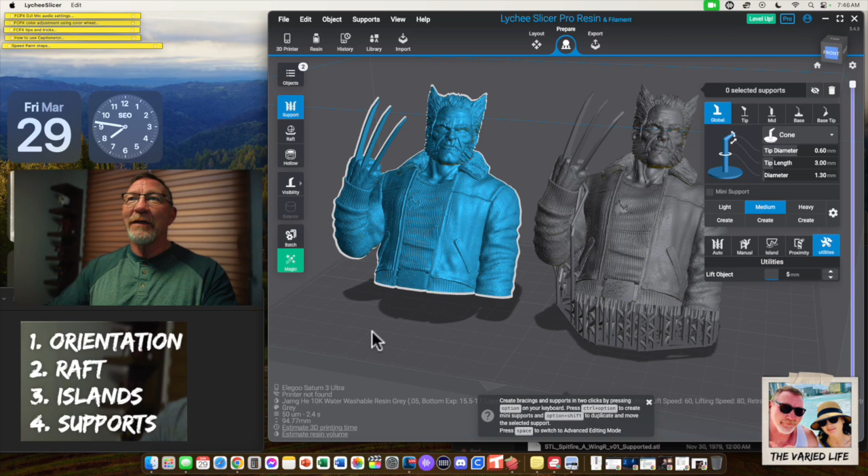So it's kind of like a final exam, if you will, but doing enough practice by using pre-supported and the unsupported models can help you become a pro at doing manual supports. So let's get started here. What we end up having is Logan. Logan is the man. First, we're going to talk about orientation. How do we orientate the model?

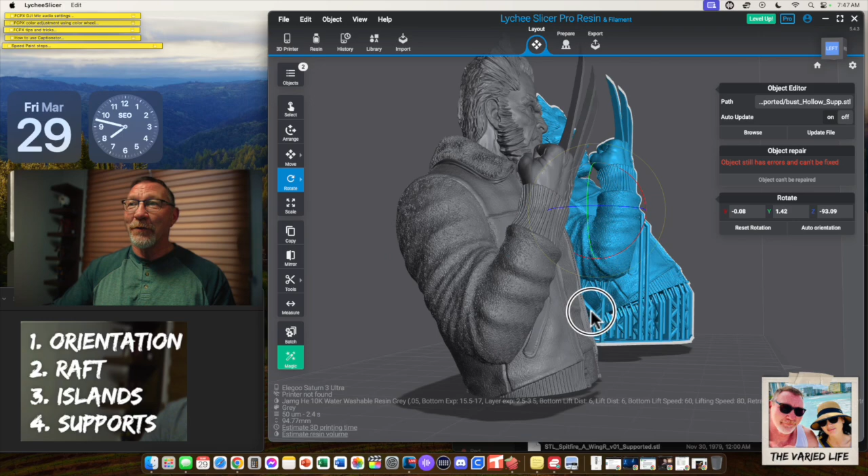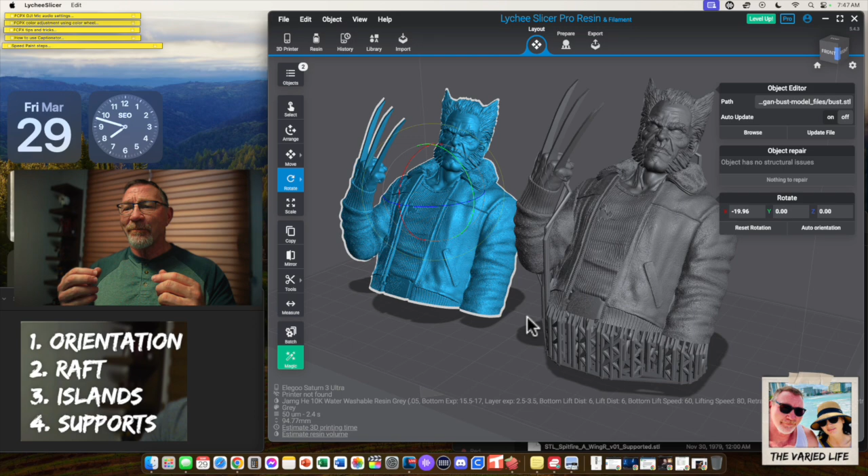And if we look on the pre-supported file here, basically what we can do is look at that angle at which he sits and conclude, I don't know what that angle is, but it prints out perfect. So what I can do is go with this model here, and I can orientate that in the same manner that we have there. So we're good to go. That answers the question in regards to how do we orientate with a model like this. Now you can do this with miniatures, you can do this with figures or different components that you can print out individual models of, because often a model will have different parts that you have to put together.

The other thing we can do is zoom into this part here, and again, we want to look at the orientation. We already got that. The second thing we're going to take a look at is the raft. And we see this raft, and that's the lined triangle raft that's being used. Now, for some reason, the majority of the pre-supported files that I've printed out use the line triangle. So that answers the question of what type of raft should I use.

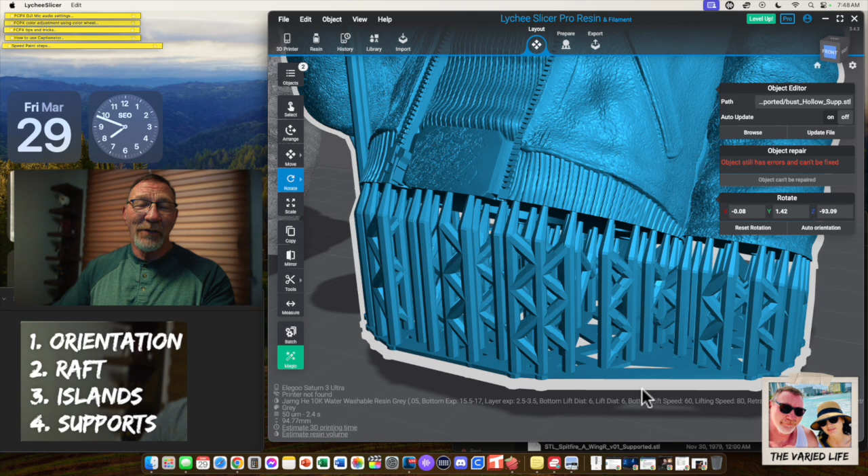There's other rafts that you can use, and we'll kind of go over that, but let's just use what works and copy that. Makes a lot of sense, especially when you print this out with no problems, right? The other thing we're going to take a look at is islands. You could use the slider.

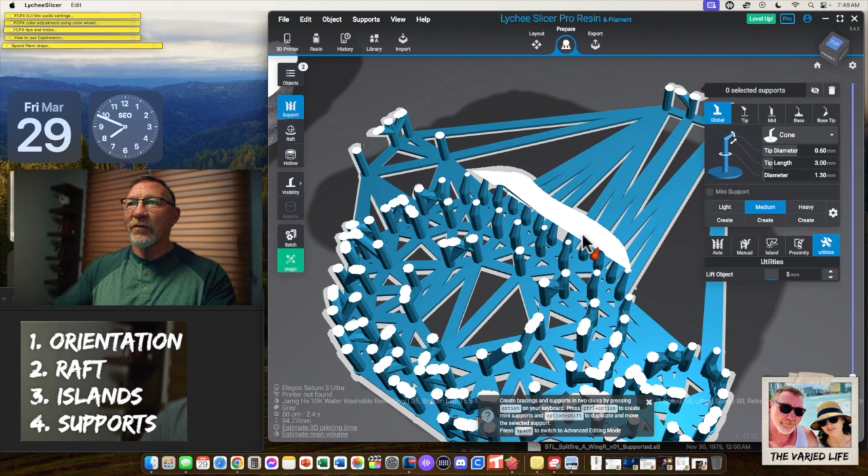So in other words, we could go to prepare, and as we bring the slider down, we can actually see where those first supports came into play on the back, and as we zoom in here, here's some other great information, like what is the distance between these two supports. We can go back to the layout, get the measurement tool, and measure between these two, and we can see that it's probably about 2.5 millimeters between those supports.

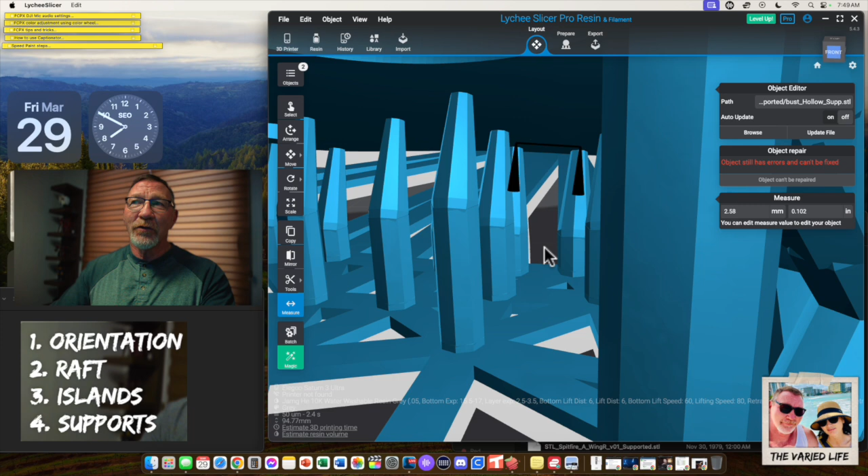So that tells me, with a successful print like this that prints out perfect every time, when I do my manual supports, I don't have to have my supports touching each other and having a great wall of supports, because that's going to be a pain in the ass to take off, and I can save a little bit of resin. So we know about 2.5 millimeters is good. Hey, we already gained some very useful information.

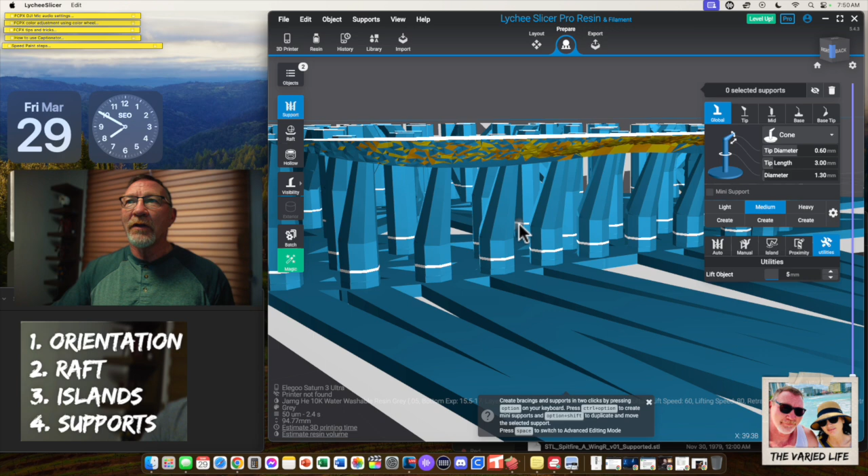The other thing we can do is, let's swing around here, if we click on this, some models will not allow you to edit the supports that they have, some models will. But to figure out what size of support we're using here, let's just throw in this support here, and we're using a medium, and we can see that the diameter of this and the diameter of this are basically the same. All of these are medium supports.

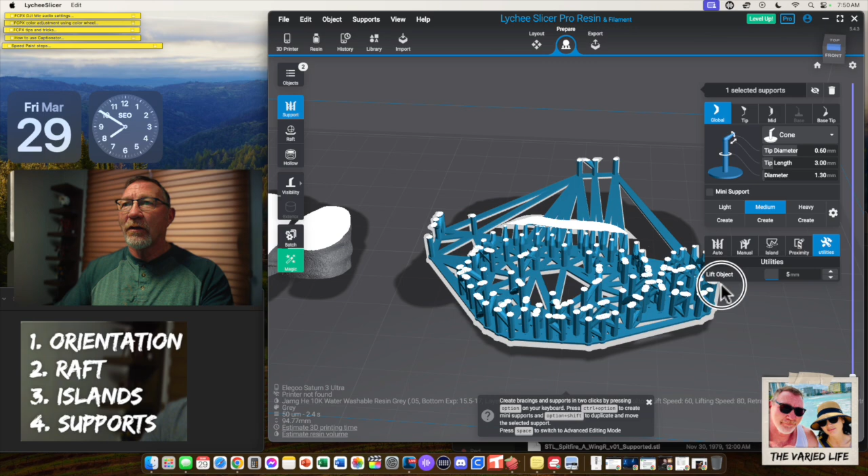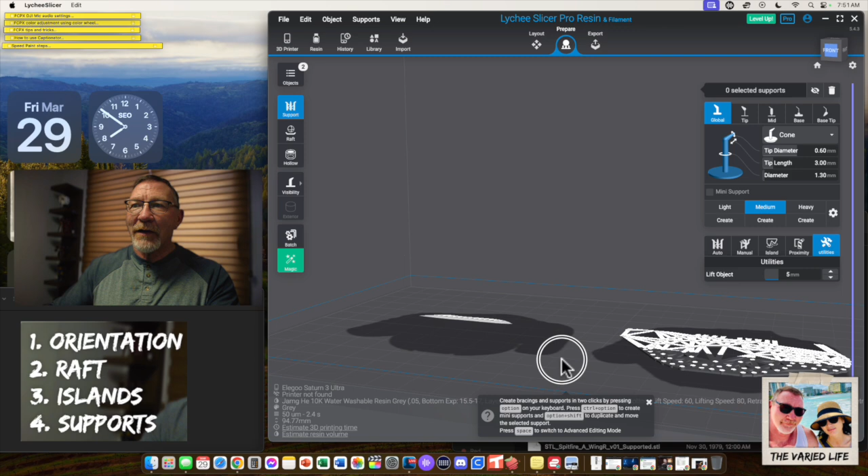So for this Logan file, all of these are medium supports. So as I do my manual supports on the unsupported file here, I can go ahead and use all mediums, and it will print out perfectly. Now, you will have some people that will say, use the slider and bring it down till you see that area right there where you should put your first supports. So we could go here, putting our supports here.

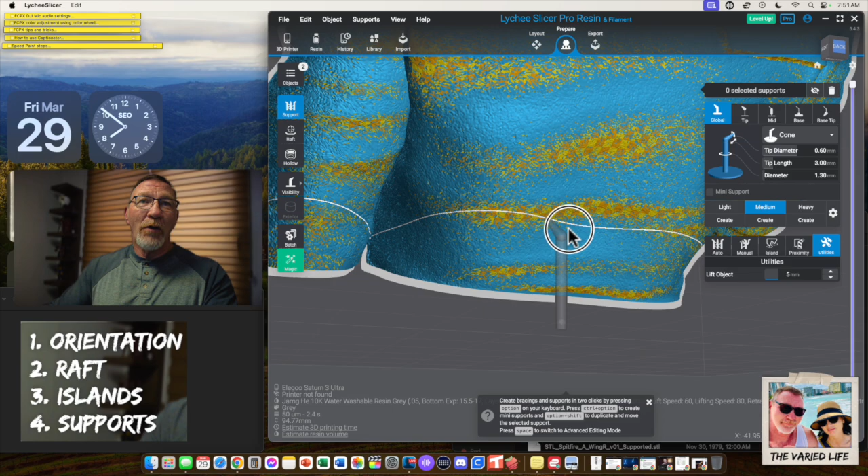And that's a workable solution, but Lychee Slicer Pro actually has an island support detector that is invaluable and will do all the hard work for you. So we go back out here and we go to the right side. We have auto supports, manual supports, island detector, and of course proximity and some utilities. But the island detector is an awesome tool. There's 4 different settings: fast, normal, detailed, and real.

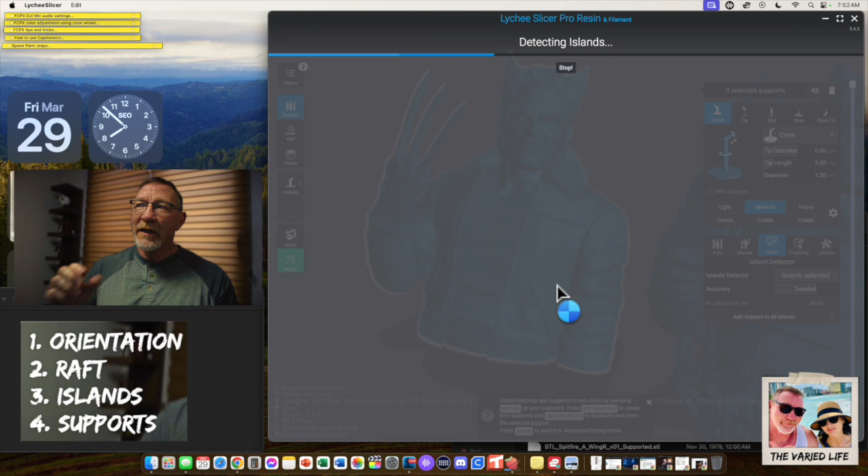Depending on your computer, if you go to real, that could slow down and take a little bit of time. But what I've found is by using the detailed search island option, it will go through this model and detect all the islands, and we can use that slider bar, and it will be indicated in red where we can put our supports. And then we could also put some other supports as well. But these supports are going to be very important for supporting the model.

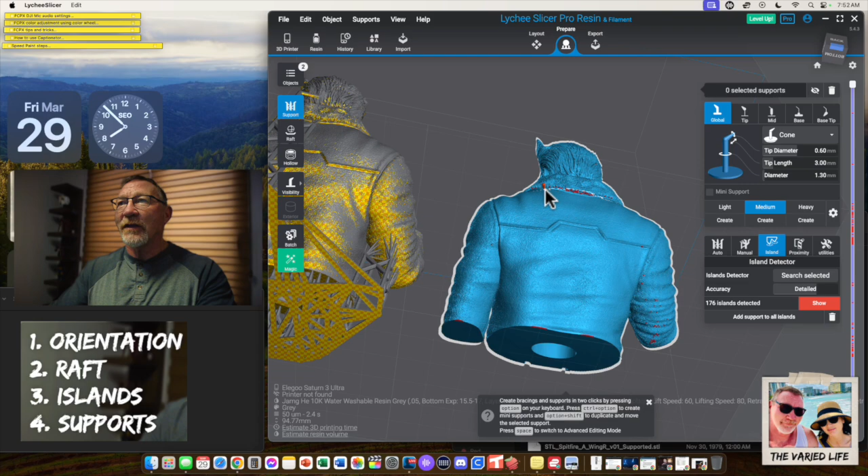So as this finishes up, we see that there's 176 islands. That's a lot of supports. We can see a lot of red up here, and a lot of red down here, especially on the back of the arm. And if we look to the model over here, we see all of these supports and the supports around this area, similar to what we see on the arm there and on the arm on the unsupported one.

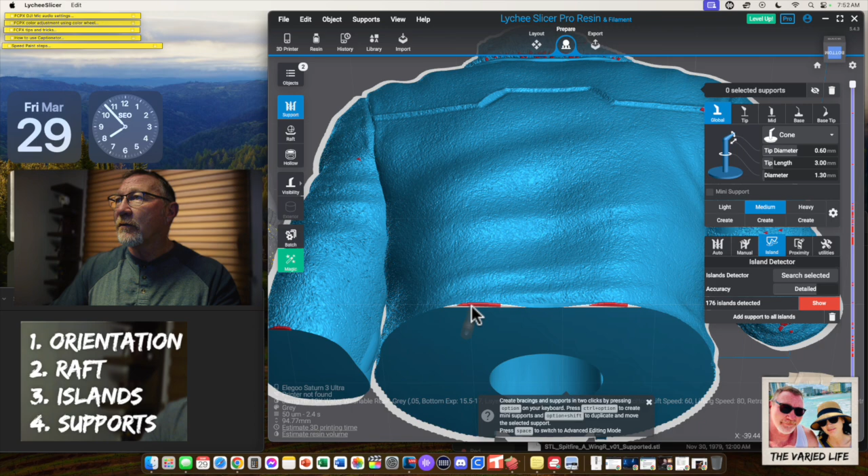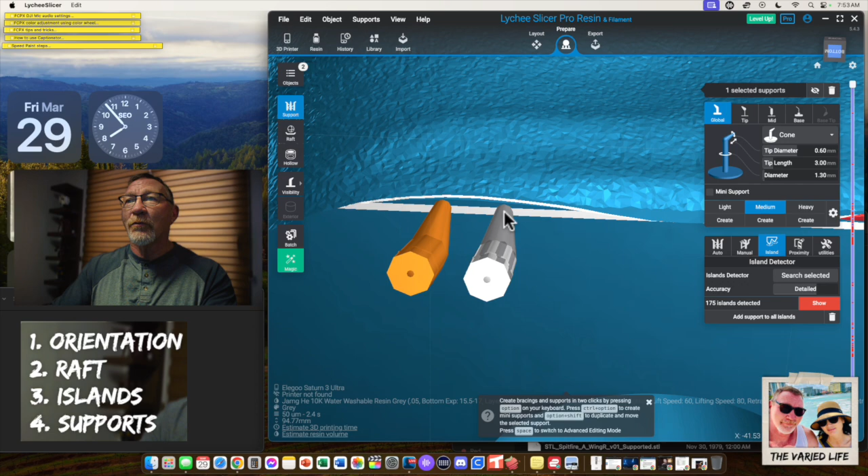So we could go through, and knowing the distance between, we could throw in our medium support. And as we go in there, we know that we can put in a little bit of distance. We don't want to do something like this, where that edge is going to cause some damage to the print. And we know from that other pre-supported model we could back this off and have some distance between, so we can go ahead and put our medium supports.

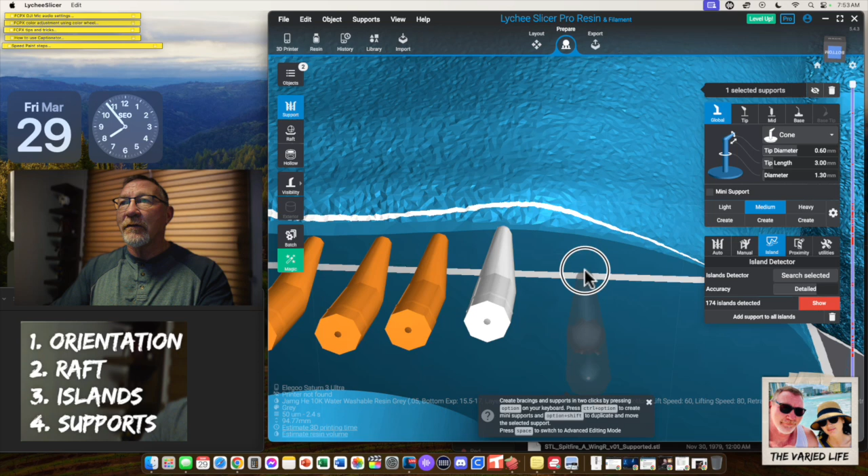We just run through and continue on with that. And yeah, this will suffice. Is that one hitting a little bit? No? Yeah, it is. Back that off a little bit. Get it right there. And we can continue building our supports by using that island detector, and go through the rest. As we go over here to the arm, we can do the same thing. We can zoom in and put our first medium support.

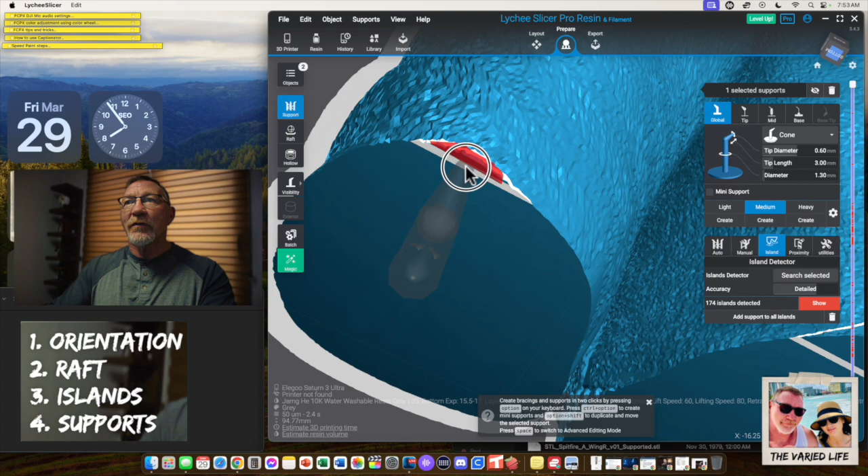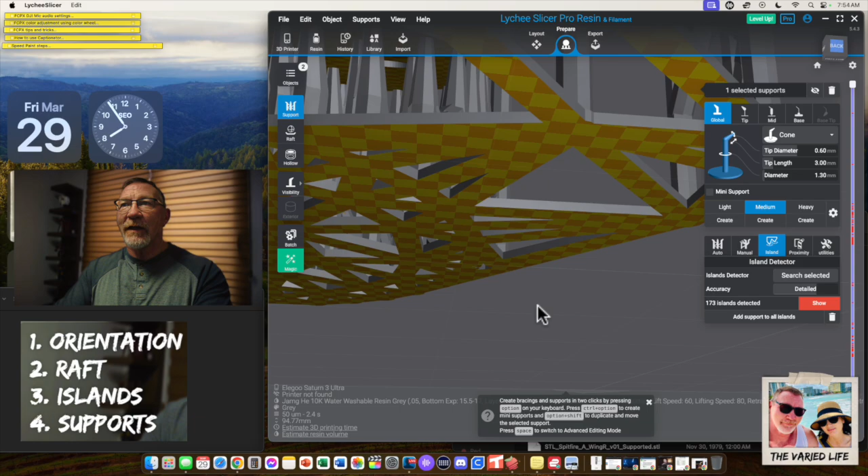And that should be, well, let's go a little bit more. Yep. And then the same thing, we can just again go ahead and put our supports all along this, similar to what we see on that pre-supported file. So we've got that there, and if we look over here, again, we see the similar distances between the supports. And yeah, all we're doing is just copying what we see on the pre-supported file, and we will get a successful print as we continue to go around and put supports on here.

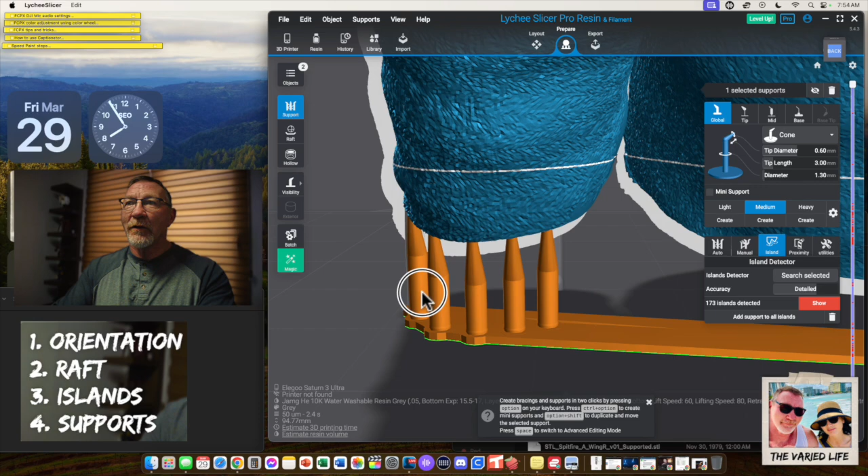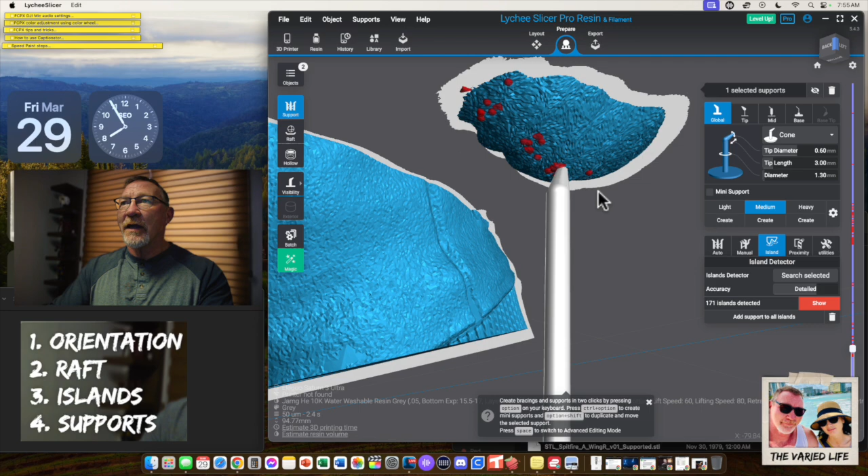Now again, if we look at the slider bar over here, all these indications in red will indicate an island. So as we go up, we can see, okay, we're coming across some more islands, and we see one right here on that elbow. So as we zoom in on this, it's indicated there, bam. As we want to make this a support pillar, you can go ahead and do a vertical support, a support straight, or a support pillar. And then what we can end up doing is addressing all of these things here.

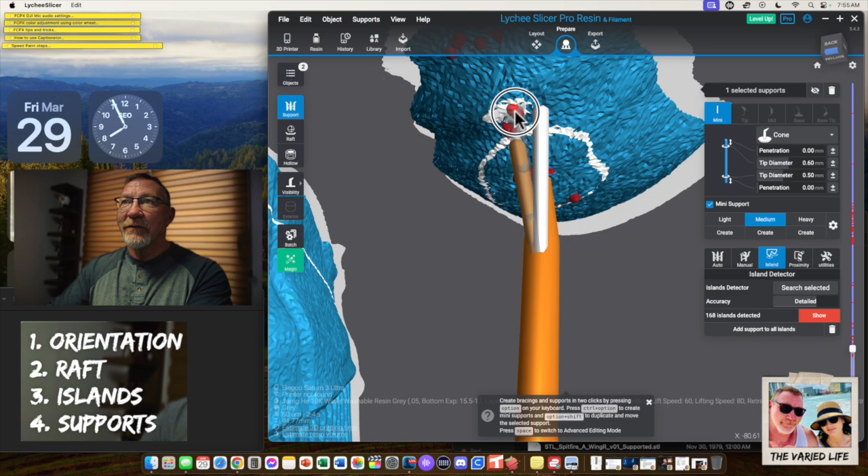Now I have a Mac, so I use Control Option, and I can click on some of these things, and then I go back to the support itself, and it'll put a medium-sized support. And then if I hit Option Shift, I can replicate that same support all around where I need it, to be able to place these mini supports in this fan, as we see here, and we're able to hit all of these different areas and address all these islands to give the support that this model needs for that elbow, which works really well.

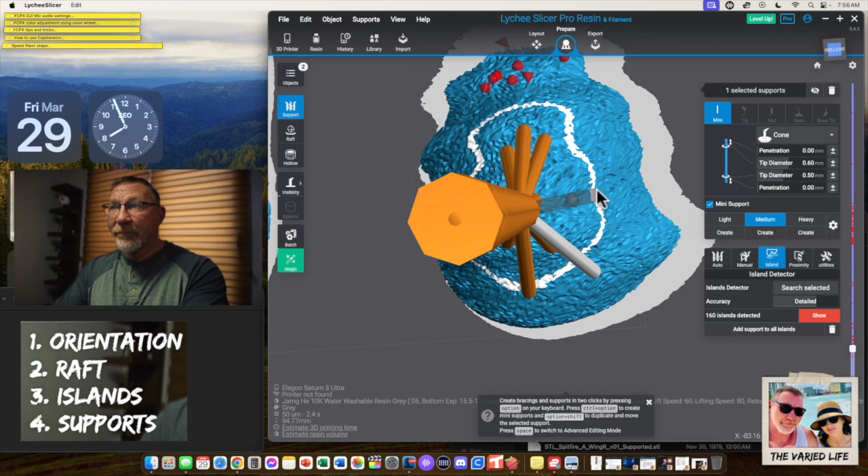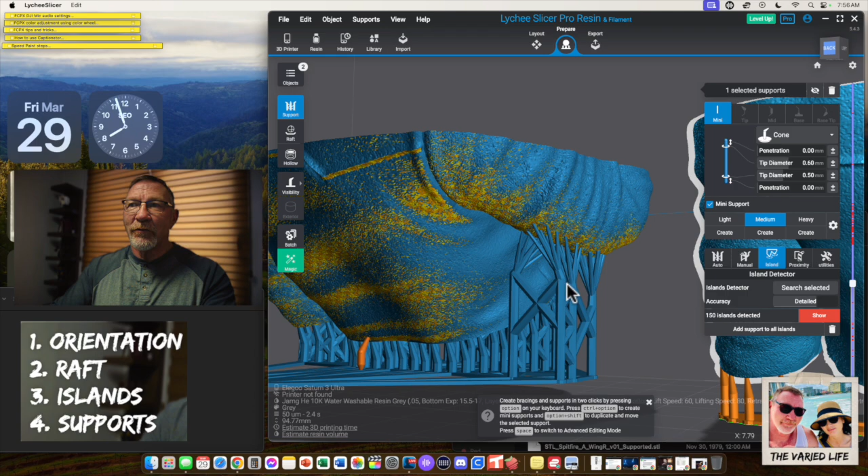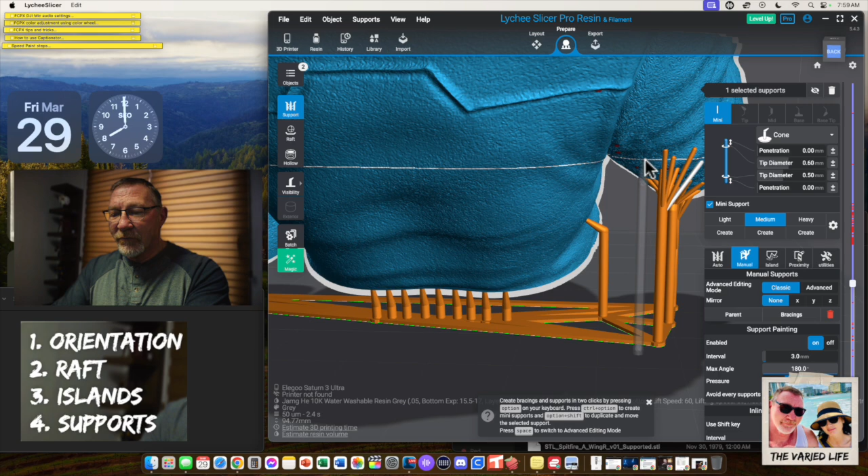Now we're going to speed this up and continue the support in the fan for the elbow and the arm, and we're good to go. So that's what we end up having there. And as we back up, we see the same thing on the pre-supported file. They've got a little fan system. They do it a little bit different, but on the front here, we can see that they just have that one support that goes up that supports the elbow. Then they have another one that comes up here, and with their island detector, they ended up doing a little bit more and doing two off to the side here. So again, it's a great way in which we could add supports and get those islands covered.

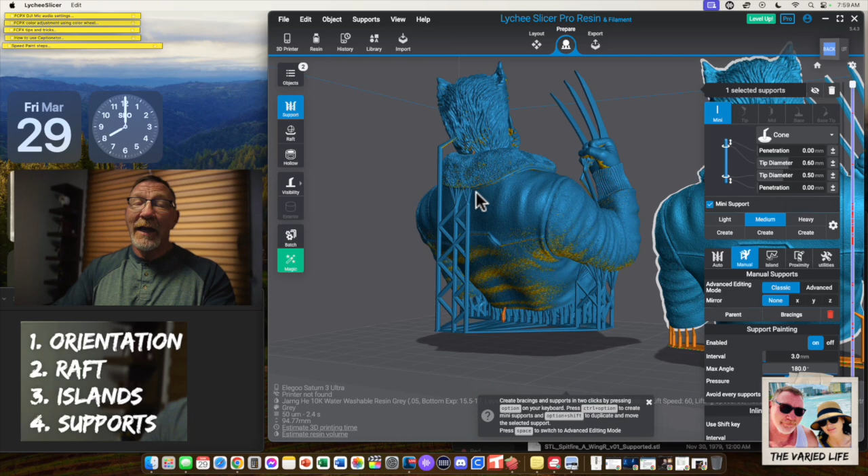So we can continue on, and you can actually practice and do the entire model. So for example, we go to the back. Before, I would have thought you would need a ton of supports on the back of this figure. And I have done a ton of supports, and it just ended up being a hot mess. But as we zoom in here, by using the slider, we can see where the very first islands come in, and we can just end up putting our supports in.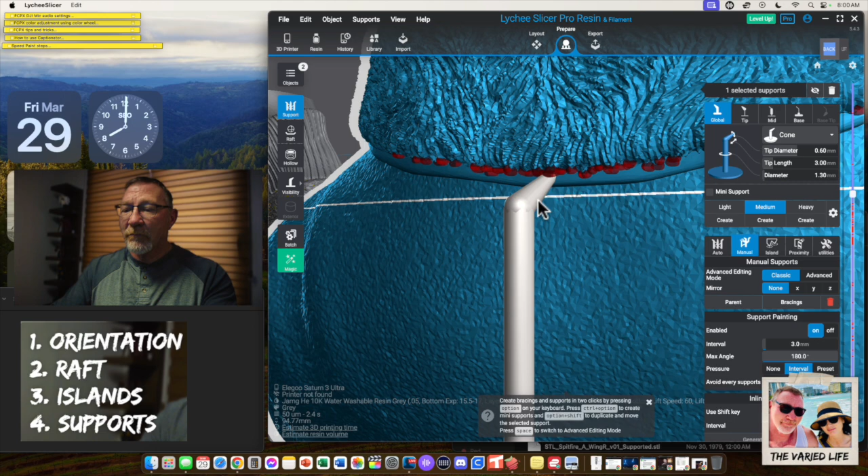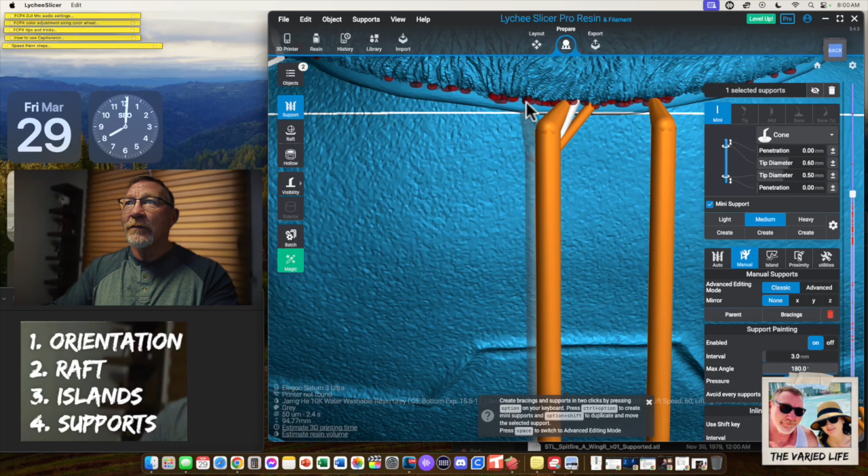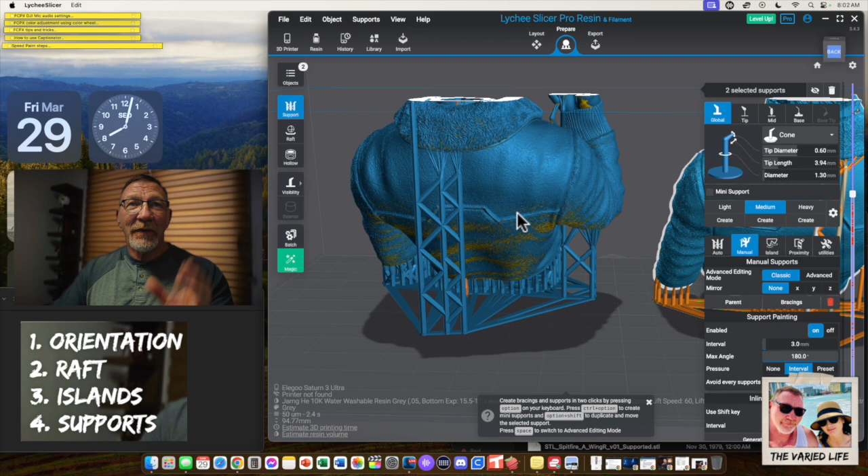Let's go ahead and put our supports in there, and we can put in a support there, and then the same thing, we can go ahead and just put these little mini supports in to hit these different areas and give that much needed support. The other thing we could do is select both of these, add some bracings, and voila, that's what we end up having, which is very similar to what we have here. So again, we're using the pre-supported file as a guide on how many supports, what type of supports, using fans if they use fans. There's the distance between the supports, we can use that as a guide, and it comes in really helpful. And again, all we're doing is copying what works.

We're going to be using this little dragon here from Dragon Trapper's Lodge. It's a Spitfire Wyvern dragon, and that's kind of a cool little dragon. It's got a base, a body, a couple of wings.

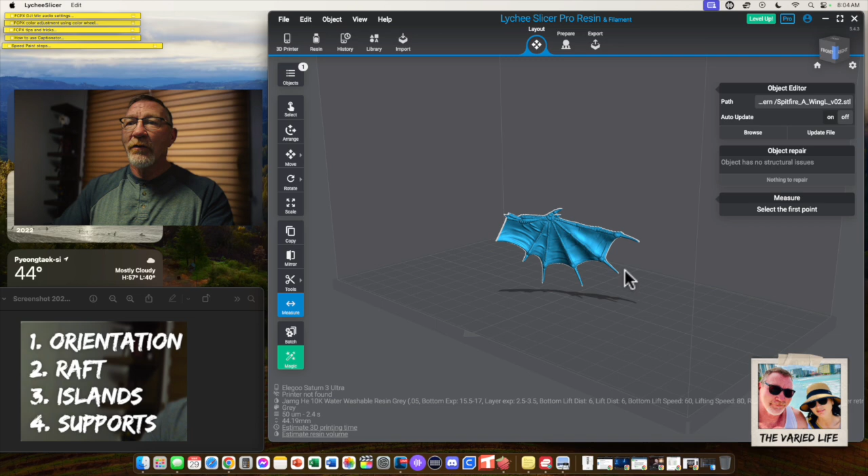So we're going to put this to the test, and we're going to take a look at a wing, and we're going to drag that into Lychee Slicer, and we're just going to start, and we're going to do the supports. So there it is. And we're talking about orientation. And when you get enough practice, you'll get to a point where you can actually say, okay, how are we going to orientate this?

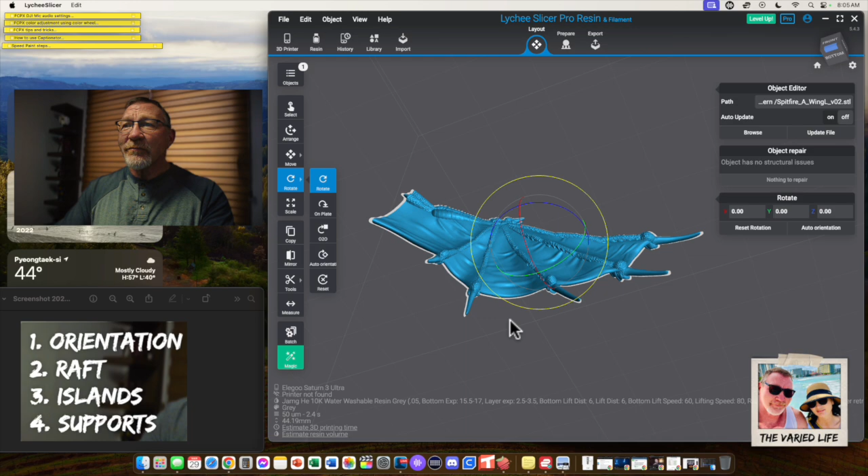Now, there's a couple different ways. Could we print this in this position here? Yeah, but we might get some damage along this side because that's a really smooth edge. And even with the small, medium supports or light supports, yeah, I don't want to do that. So another option that I could end up doing is taking it and putting it on this edge here. Because on the bottom of this, it's really textured and you wouldn't really notice any divots that are caused by the supports.

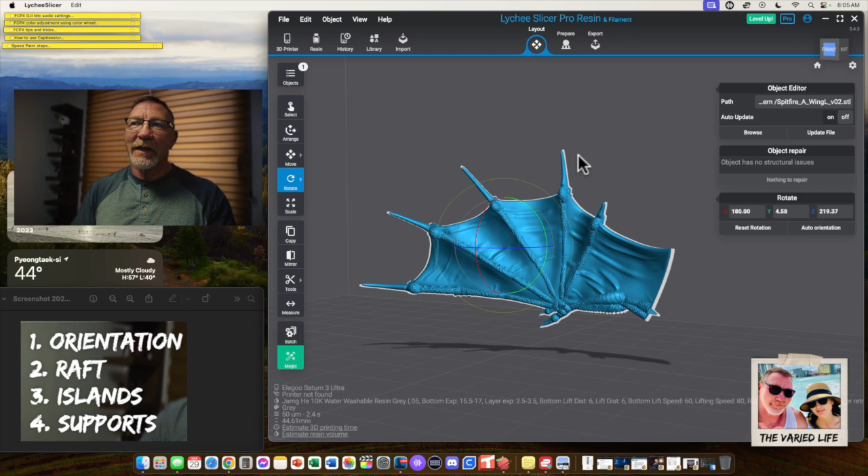There might be something to this in regards to printing, because how many layers are going to be in this from the bottom to the top? Well, probably about 400 or 500 layers, 600 layers. Whereas if I printed it up and down, that would probably be about 1300 or 1400 layers. And again, this is all just experiencing and reverse engineering, look at the pre-supported files, and then practicing on the unsupported ones.

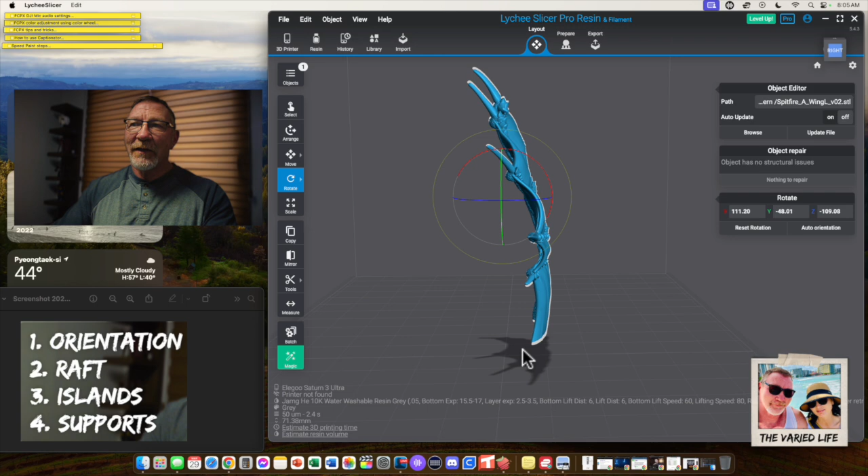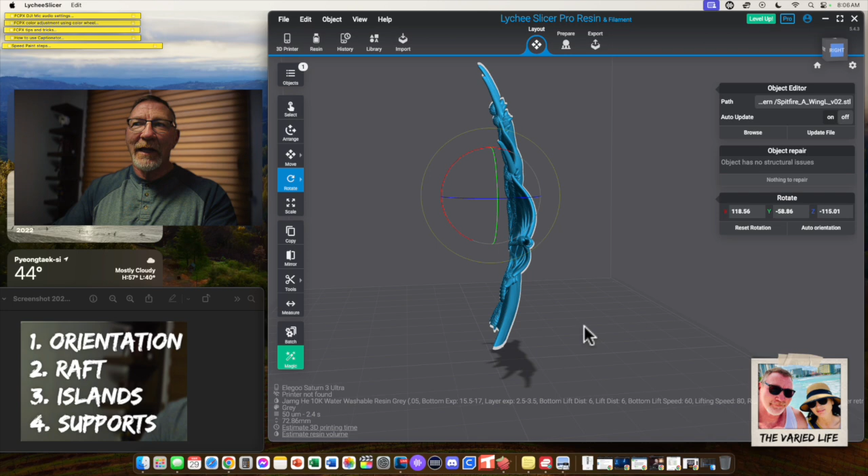Now, what I found out is in regards to orientation, a lot comes into play with the shadow. So if I put this in this area, we see a large shadow. And so on this entire face, there would be a lot of supports. To minimize the damage, I'm going to rotate this to a position where I have a minimal amount of shadow. We don't want a lot of overhang, and we know from doing a number of practice sessions that in this up and down fashion we've got a small shadow, and I think that will work.

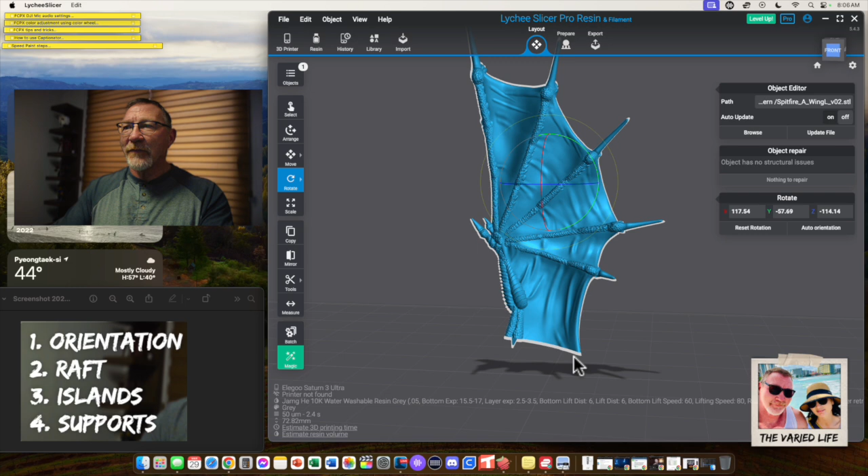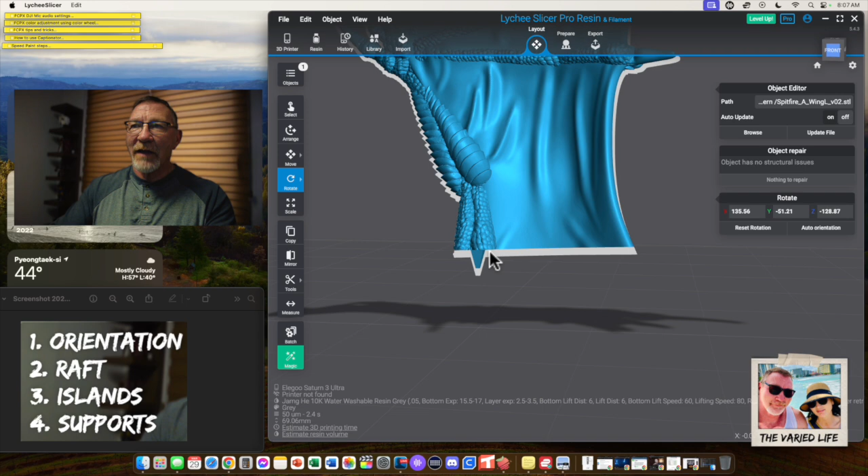Now comes the orientation on how do we tilt it. We know that this bottom corner down here is probably where we could end up putting a support, but we also have this little notch here, this nub that sticks out where this wing attaches to the body. What I'm going to do personally is rotate this with a little bit of angle, so that way this notch, or this nub, is the very first island that we see. And then we'll just have a string of medium supports going up along here, and we might have to add some supports up here and maybe up here. But for the most part, that angle looks pretty good.

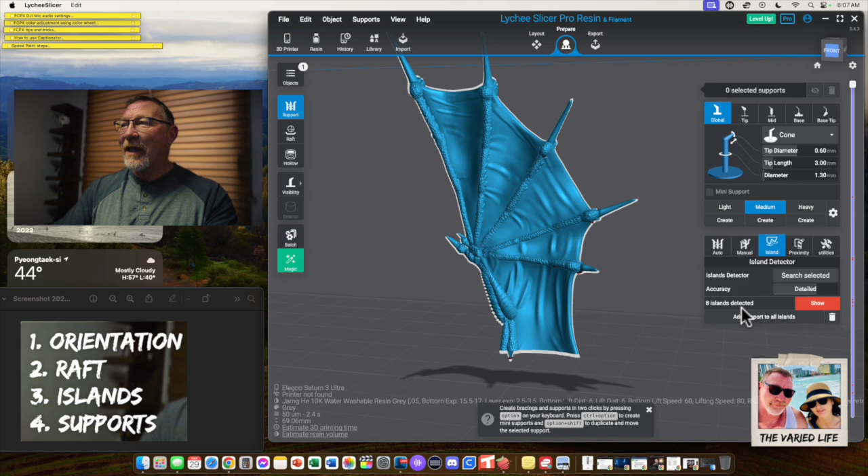So we're going to go from the layout to prepare. And again, we're going to select the item, and we're going to do the island search. So as we go through this, the slicer program does all the work for you for detecting the islands, and it has 8 islands, which is pretty good. And if we go to the very first one, yep, that is the first one there. And we know by doing a lot of practice that we're going to be using medium supports on this entire thing. So we're just going to put one there, boom, that is good to go.

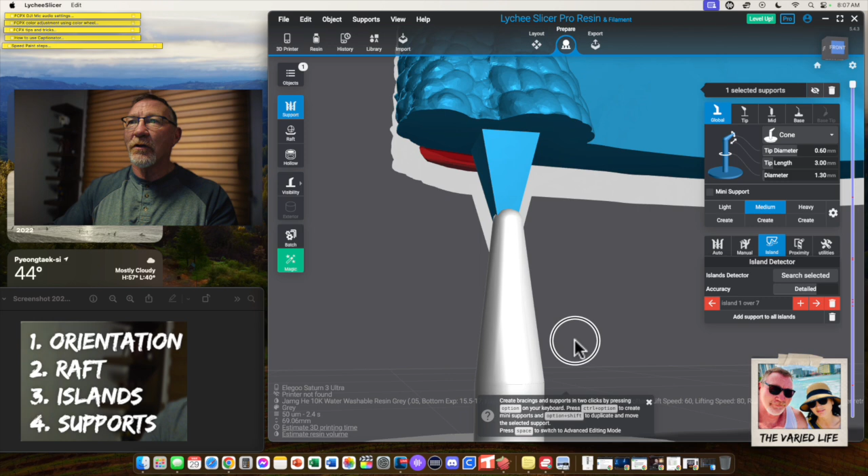I'm not too concerned about the placement of this if there's a little bit of damage, because this end is not going to be seen. It's going to be in a socket, but if you're really kind of anal retentive about it, you could get it to the point where it's 100%, but that's good enough for government work. So now, that is the very first island.

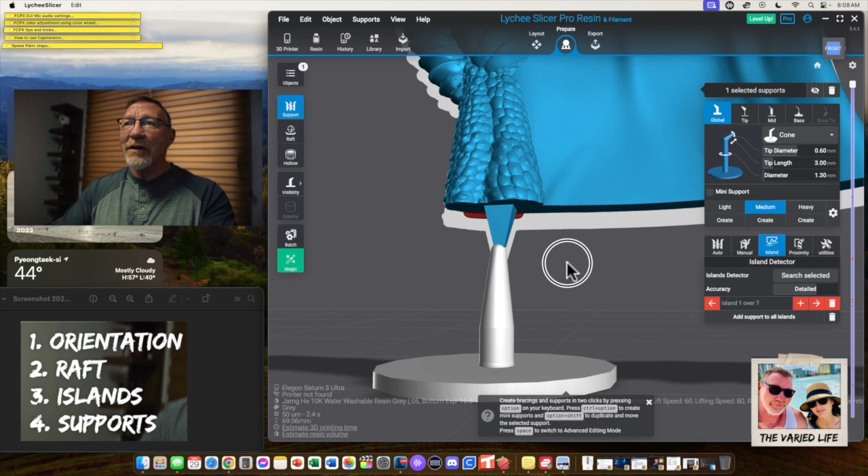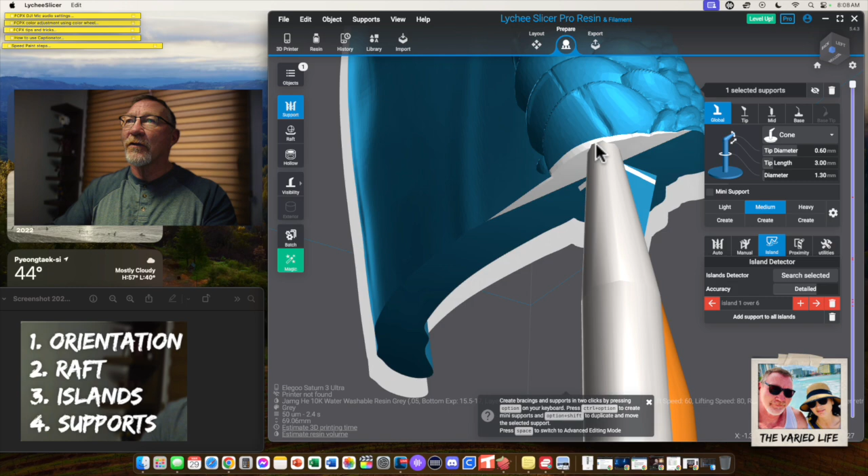This over here is the second island. So what we can end up doing is adding a support there. That will cover that. And again, we could probably bring this back a little bit so that way, yeah, it's not going to cause any noticeable damage. And then all we can end up doing is just kind of going around and continuing putting some supports in here. And that's probably a little bit too much.

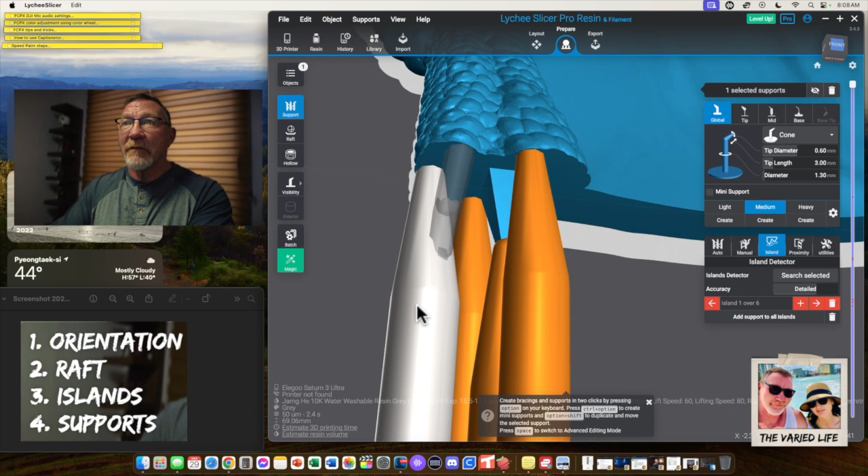Let's go ahead and we'll put one here. And to get some of these areas, for example, I could end up clicking this one. We'll just put a little bit of fan action there to cover that. Click this one, do a little bit of fan action there. And then we can just continue down.

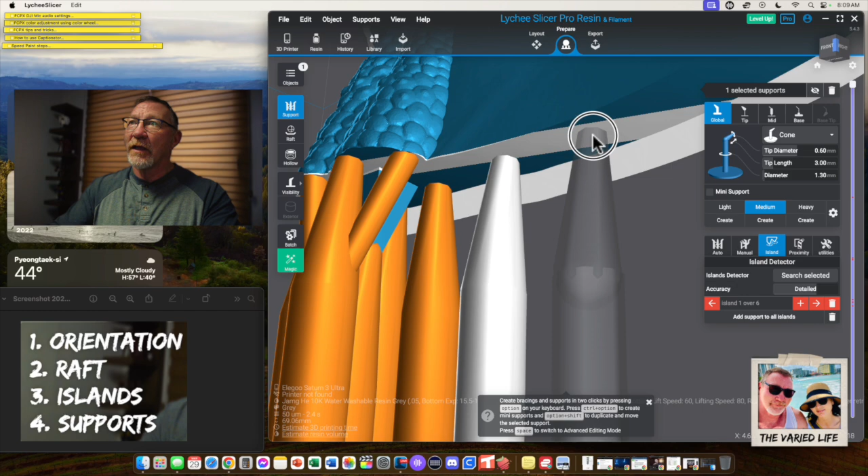We'll put one here, and then we know about the distance, about 2.5 millimeters in between there, and we can just go ahead and do our series of supports along the face of this wing. And I think we'll be good to go. And there it is. That should suffice in regards to what we're going to do.

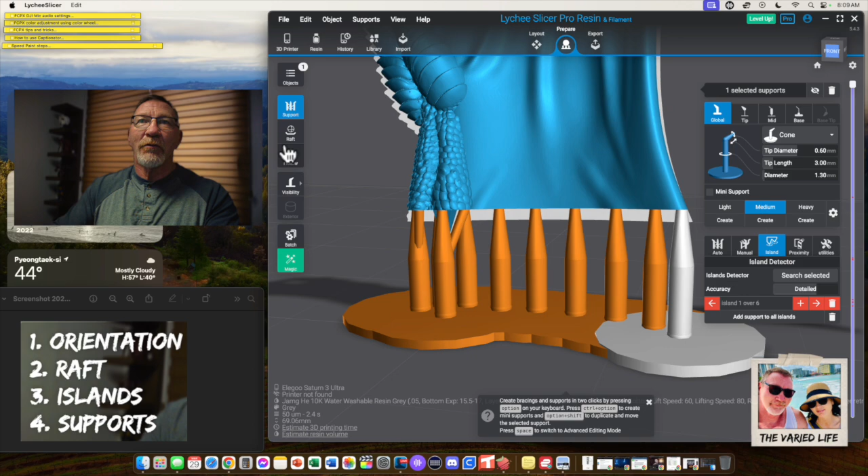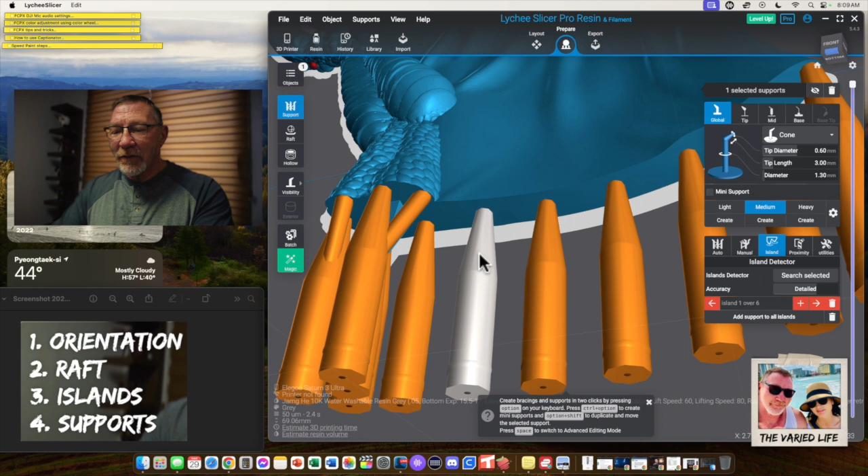Now we're at the island, the raft. Let's make that a line triangle because I just see that as being the one that's used the most. Now this will totally work for the support of this entire wing. They're medium supports. We don't need any additional supports, but if you wanted to practice doing some rafts or some fans, we could go ahead and do that. We could click and do something like that. And I think we're good to go there.

The other thing that we can see from our experience of practicing and taking a look at the pre-supported models, we see some bracing. I've seen with a lot of models, they will brace supports in groups of 2 or 3. If we go to manual, we'll go down here to bracings, and there's no bracings added. So what we could do is just click here and boom, adding some bracings, in sections of 2 or 3.

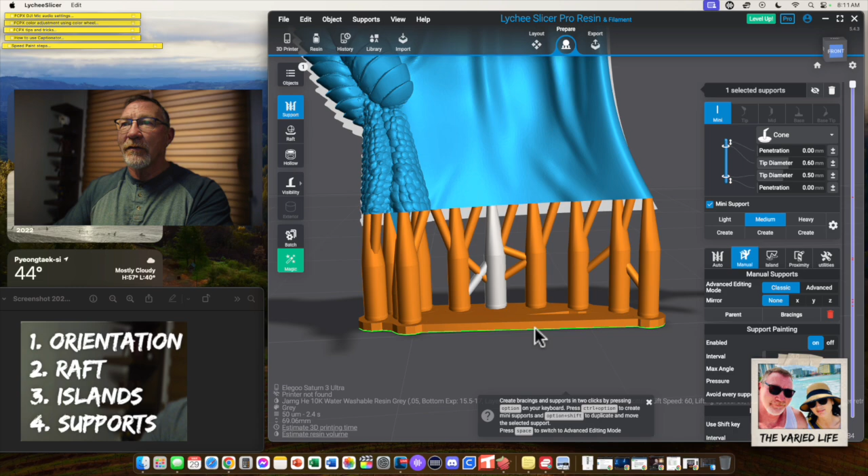If they're all clumped together, then it's a little bit harder to take them off and it might cause damage to your print, especially something as small as this wing, which is about 2.5 inches. So what I'll do is group these together and create little bracings on my own, so that way it's a little bit easier to take off. It gives that rigidity, but again, it's only about 5 millimeters. It's not really necessary.

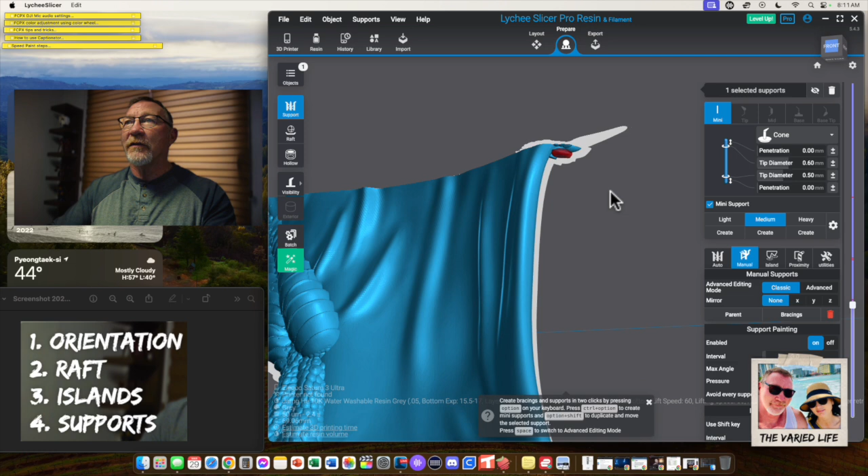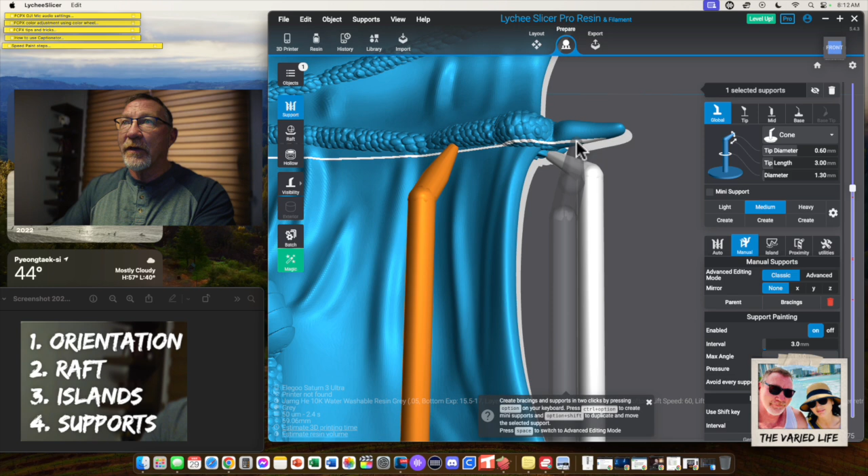So then we can continue up, go to the slider, and look for these little red indicators to show us the next island. And there is the next island right there. We'll throw a medium support there. And as we continue on, we can throw a medium support there. And if I wanted to, I could put in a little fan and click on that and just give it a light support. Same thing.

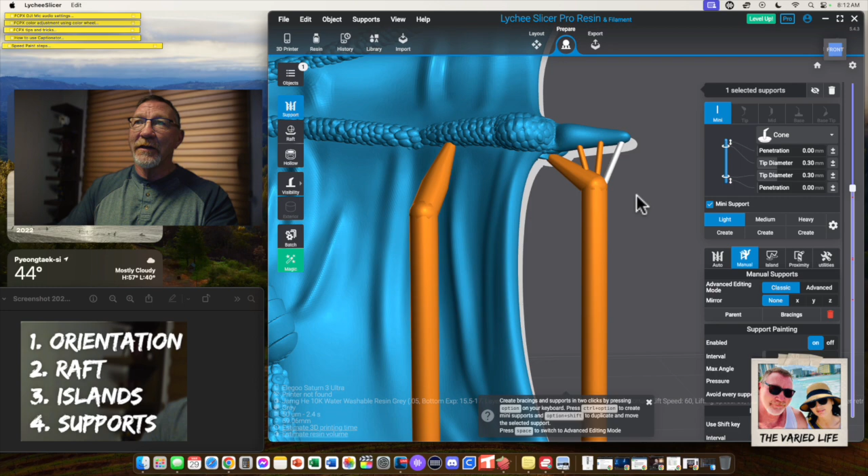Light supports are really, really small. Is it absolutely needed? But something that's out at about a 45-degree angle to the side like that, I think that will work well. It might not be necessary, but it gives you a little bit of practice. We'll select both of those and put in some bracings. Now we're going to fast forward because it's pretty much all the same thing. Just putting supports on the islands and we're good to go.

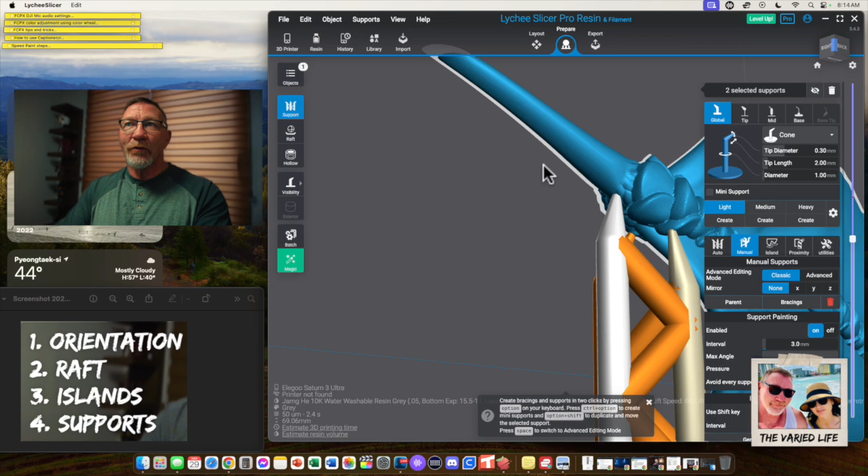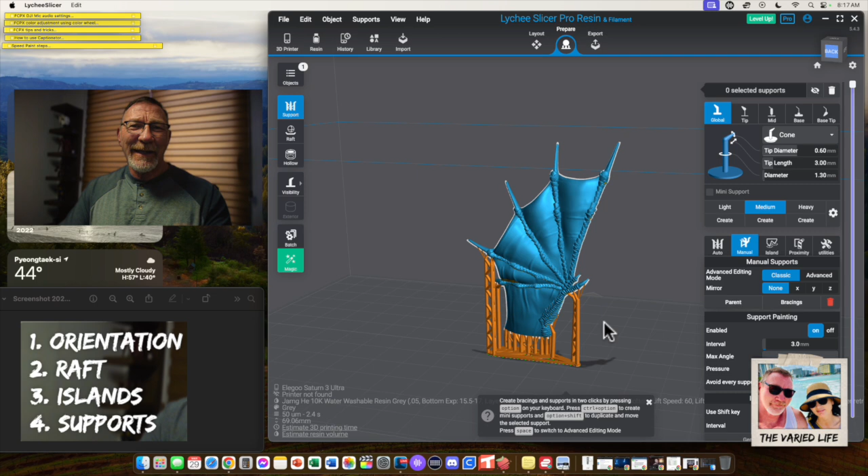And once we finish that up, here is our final result. I would print this out and I am 100% guaranteed that this would print. We would have enough support for a model of this size. Again, it's a miniature model. That was the support for the wing.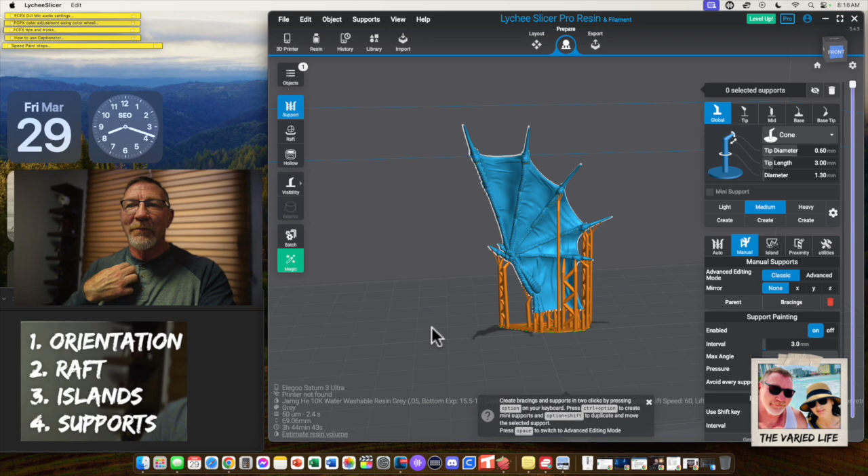Now if we do the estimated printing time for this wing, 3 hours, 44 minutes and 43 seconds. I know a bunch of you are going to say that's way too long, it should be shorter because it's a small item. I'm using water washable resin and I need to tweak my speed settings. But that would take 3 hours and 44 minutes.

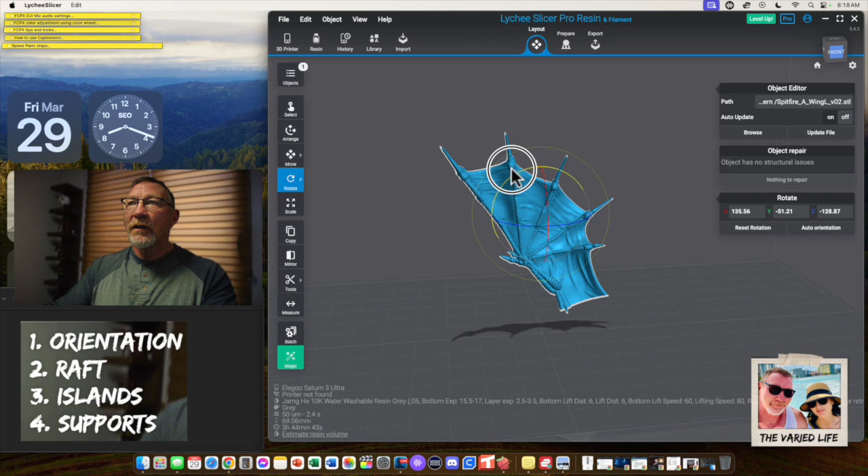Now let's remove all of these supports, go back to layout, and put it in this position here. We've got a minimal shadow, and that would print out really good. If we go back to the islands, we'll do a detailed search, and probably at the very bottom is going to be the very first one, and then we could do a series of supports along that textured edge, just like we see there, and I think we would be golden.

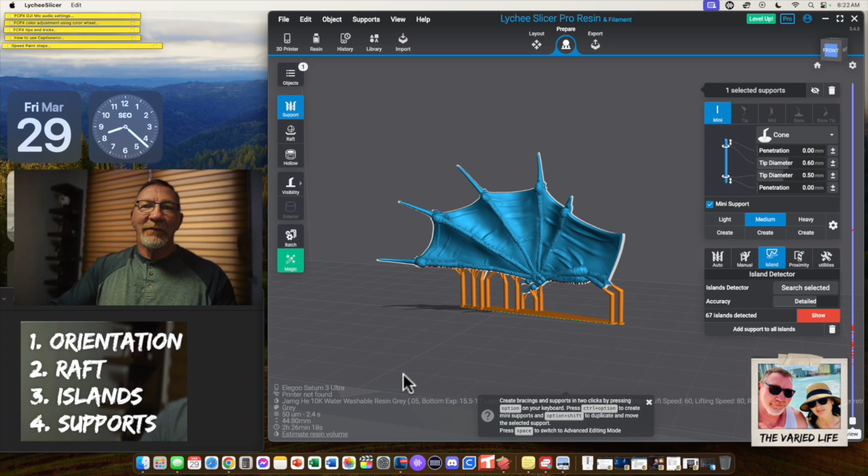So yeah, you continue on and just do that whole thing until it's similar to this. Now what this will end up doing is we can minimize the amount of time to print. So if we estimate the printing time now, it's 2 hours and 26 minutes. So we can cut this down in printing time depending on the orientation of the model.

So now that we did a little bit of practice, first what we ended up doing is taking a pre-supported file, using that as a guide in regards to the orientation of the model, what types of rafts to use, the island detector with Lychee Slicer Pro on where we put our supports. And then also by that reverse engineering type of thing, we can see whether it was light, medium, or heavy supports that were used, if there was some type of fan action, the density of supports that will result in a successful print. Again, we want to get away from having too many supports that could cause damage to the print, and we definitely don't want not enough supports so it ruins the print.

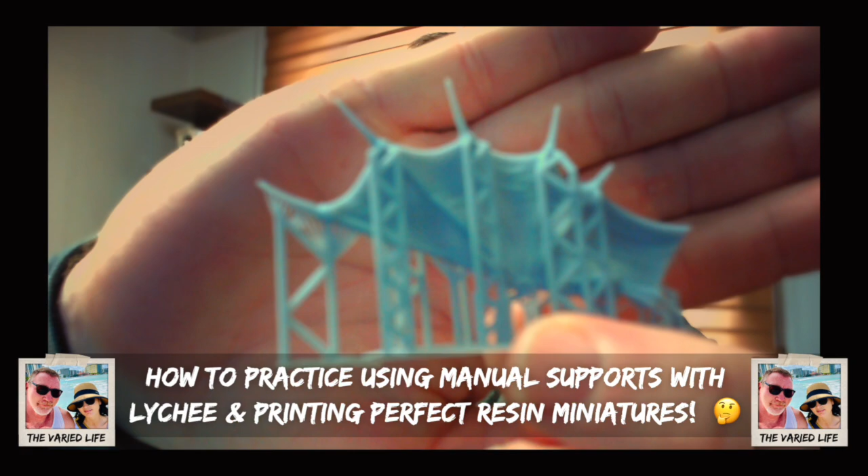Now, here comes the point that is really important. What I ended up doing is I downloaded that file, and through all the past practice sessions that I've had, I actually supported the wing in this position here and this position here. And these turned out pretty good. And again, we minimized the amount of time that it took to print that out by having it in that position. And here's the other wing that we ended up doing. And you can see there. And again, it worked out really, really well.

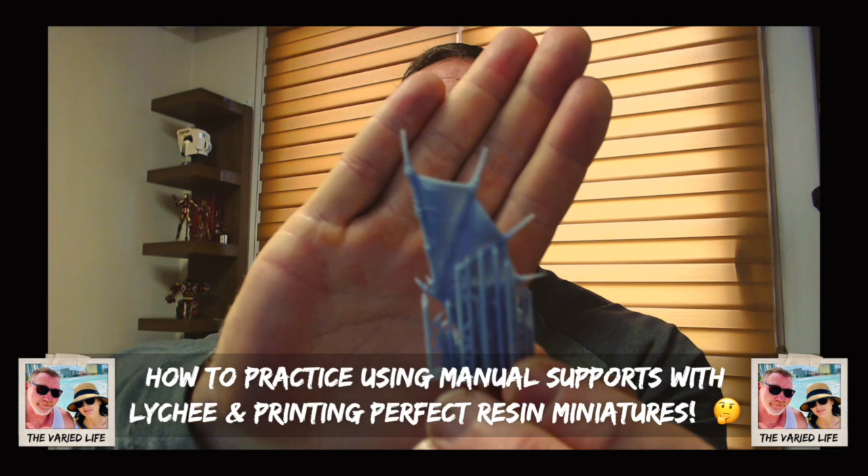So now, what did the pre-supported look like? Well, here's the pre-supported. And we can see, yeah, it is very, very similar. I had a perfect print, and this was a perfect print as well. Here's another wing that we can end up seeing here. It's a perfect print. So you can end up doing a lot of practice.

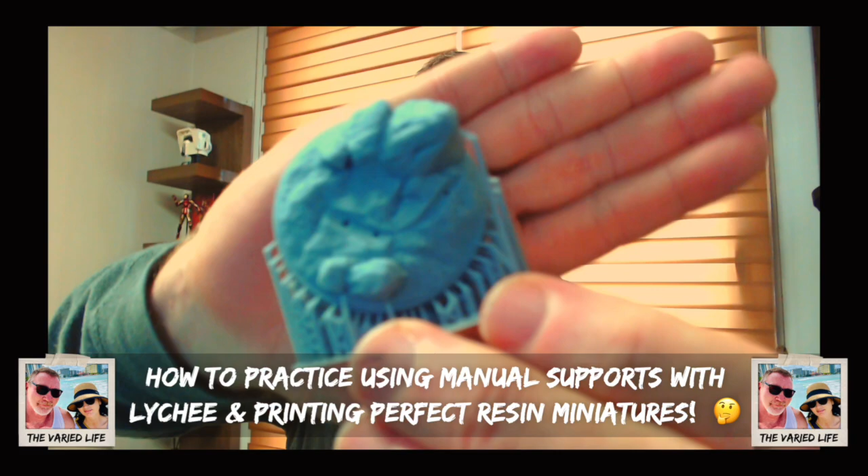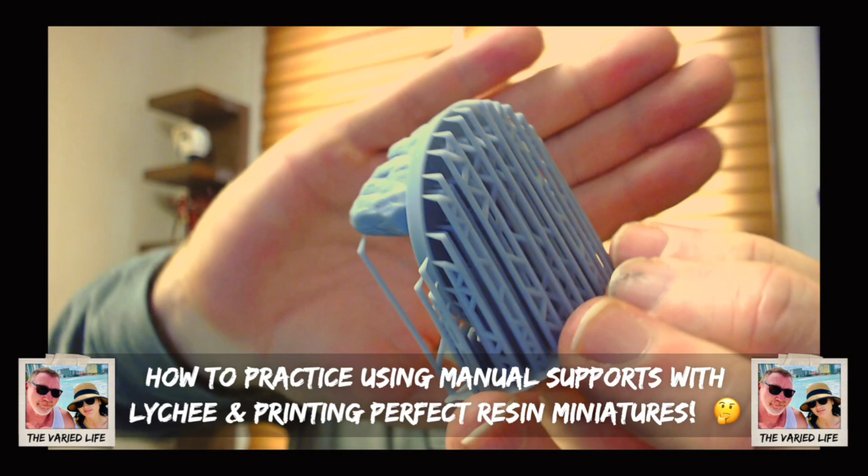And so, for example, for this base, I know a lot of people have problems with printing bases and keeping that absolute round without any deformation. All we can end up doing is using these pre-supported files to see the density, the type of supports that they use, the placement of the supports, and the distance between the supports so that we can get a successful print.

So if you actually look at this here, you can see that there's not much difference between these two supports. And they both printed out perfectly. Mine just had a few less supports, as we can see on there. Which one is mine? This one is mine. This one is the pre-supported. And it was a perfect print.

And the supports come off because I put them in kind of like groupings of 2 and 3. We don't have any problems taking off these supports. And yeah, I mean, look at that. That turned out pretty good. And we still maintained all of the details. So I am really happy with this.

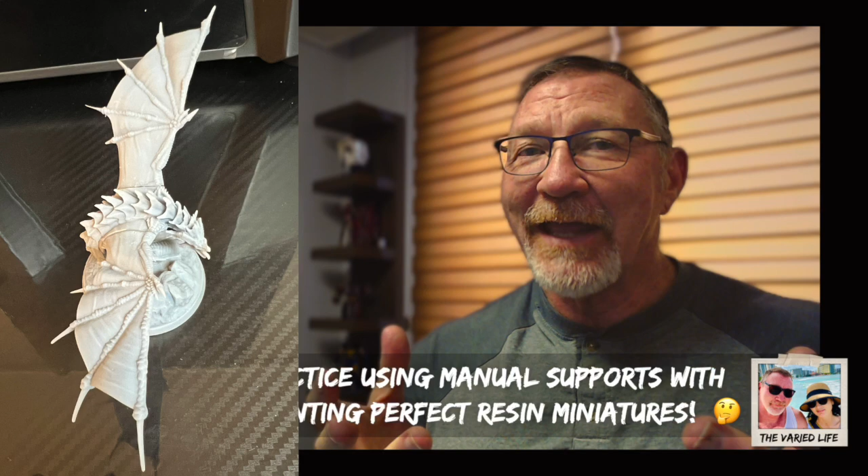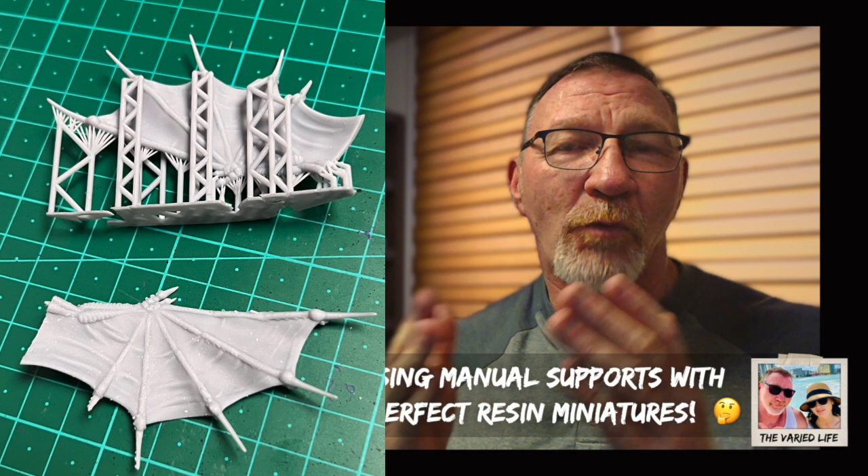Okay, so there you have it. What we ended up with is the final result of the mini that we supported, being guided by the example of the pre-supported file in regards to the orientation, the raft that they use, the island detection that Lychee Slicer Pro has, which is an awesome tool. And then of course, where to put the supports, what type of supports, the distance between the supports, and we came out with perfect prints.

Okay, so that is the process. The missing link is to use that pre-supported file as a guide in regards to the orientation, the type of rafts that we should use, the island detection that Lychee Slicer Pro has, which has been a godsend. And of course, we can use that pre-supported file to show us the supports used to support that model, the distance between them, the size, the whole 9 yards to get those successful prints.